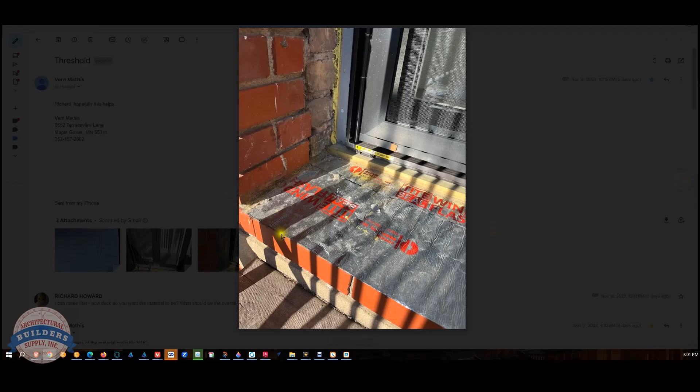We have a project where we've got a client who's ordered a custom threshold from us, and this video is to discuss and document basically the process of creating this custom threshold. Let's do that now. Okay, we're really in the final passes now.

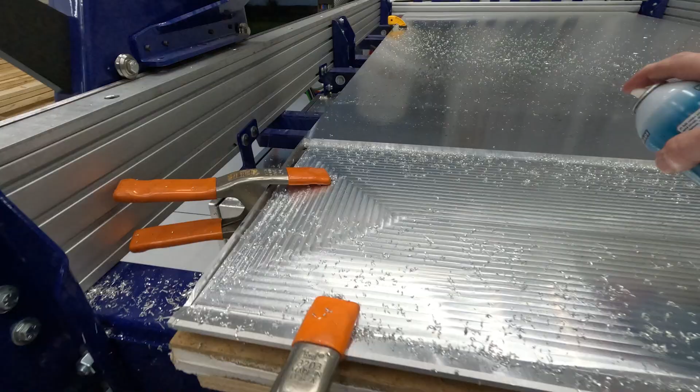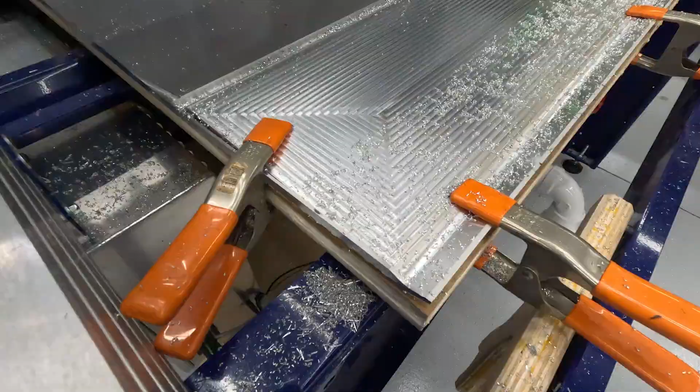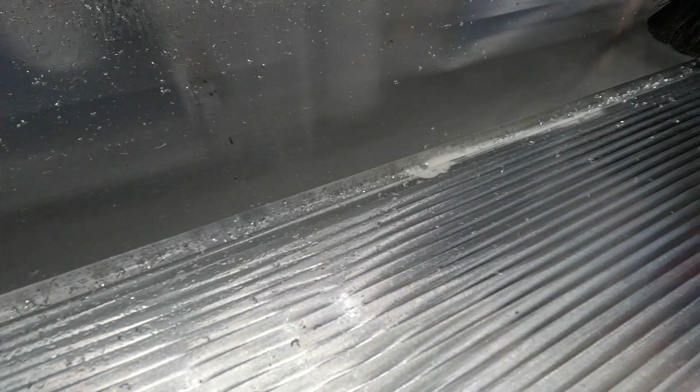Clamped down pretty doggone well, I'd like to think. No. We're going to have to go back and run that just a little bit deeper. We're not all the way through. We are not all the way through.

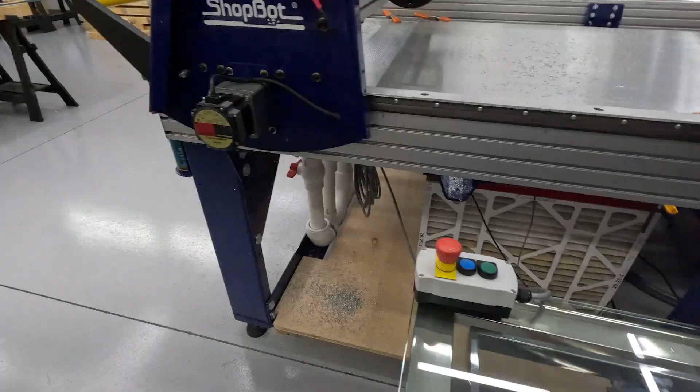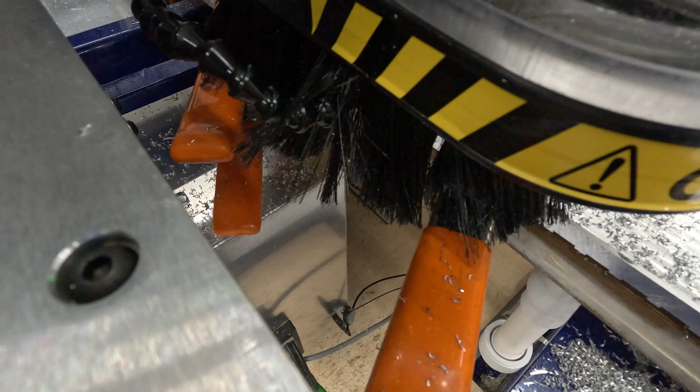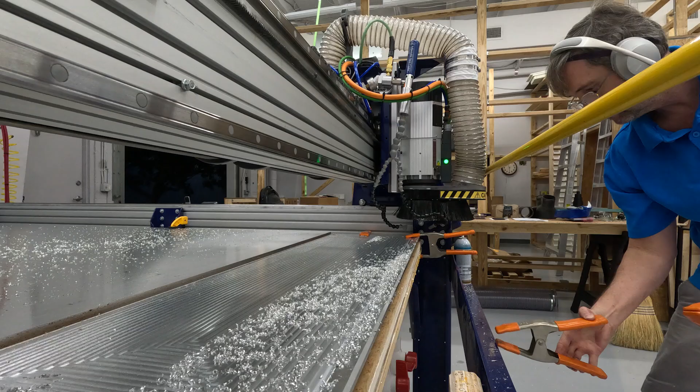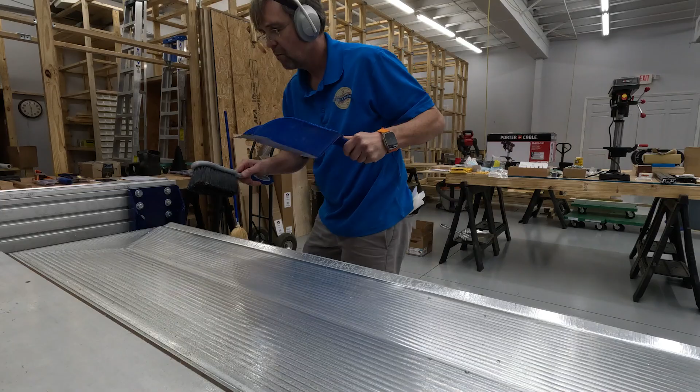Being real clean right there. Excellent. Now let's see what we have.

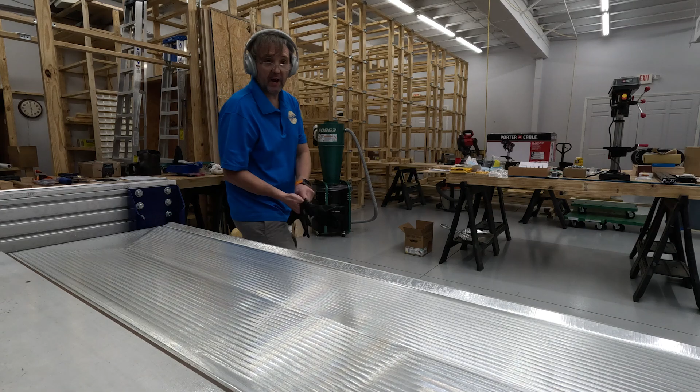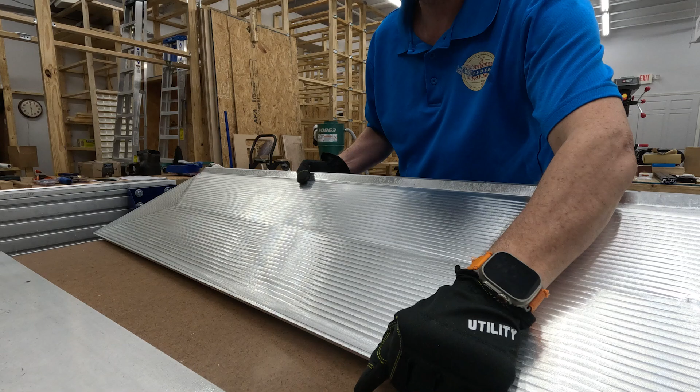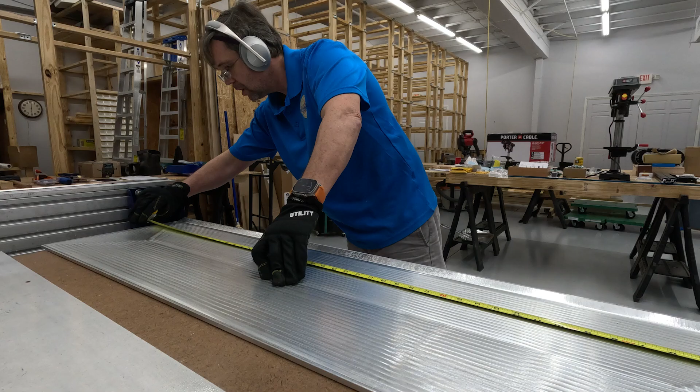This looks spectacular. This is the first threshold. First one ever made. It's 1/16 of an inch too wide, and I know how I did that. I know what I did. That won't happen a second time.

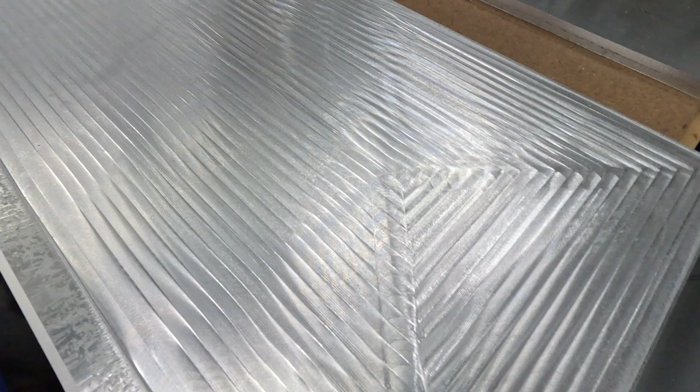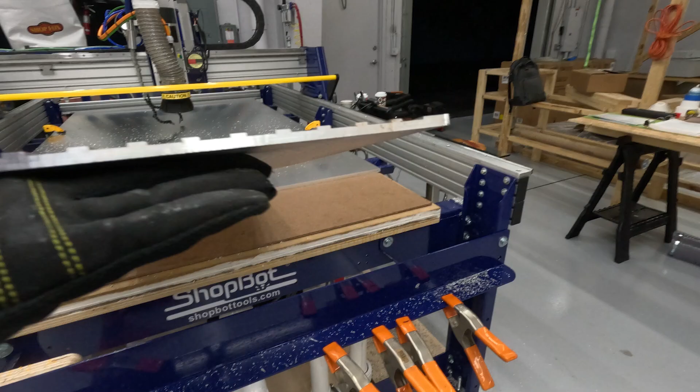It looks a lot more awful than it feels. This is all very clean. Looks really nice. That's just incredibly impressive. Beautiful. Beautiful. Probably do a little bit of cleanup on the top side of this.

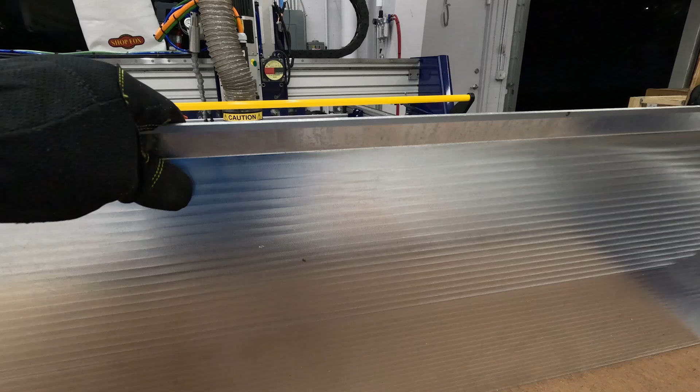I'm thrilled with this. Probably clean off the leading edge a little bit. I will. I'm going to give this some TLC tomorrow, and then I will show you the finished product before we're all done.

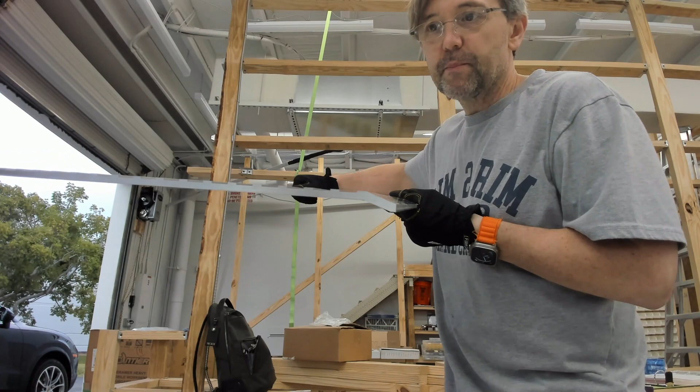Here it is. As far as I'm concerned, it looks phenomenal. I mean, for my very first project ever done with aluminum, quite frankly, while I've owned CNC equipment in the past, it was always more so in a sense of it was my company, and I'm in sales. And while I worked in the shop a lot, it wasn't what I did 8 hours a day.

So I knew how to use one of the two CNCs, the multi-axis ATC SCMI that we had. I never learned how to use that. There was no Vectric, I think, back then. Anyway, so the threshold looks really great. So some of the key components,

obviously the leading edge. Okay, so that's handicap compliant. That's an A117.1. That 140-degree angle does not violate the rise over run restriction. So I know I'm good there. The face of this also doesn't violate ADA requirements because it's not greater than a 1/4 inch.

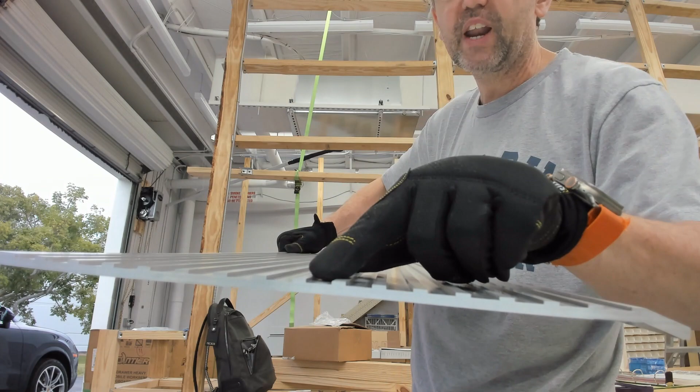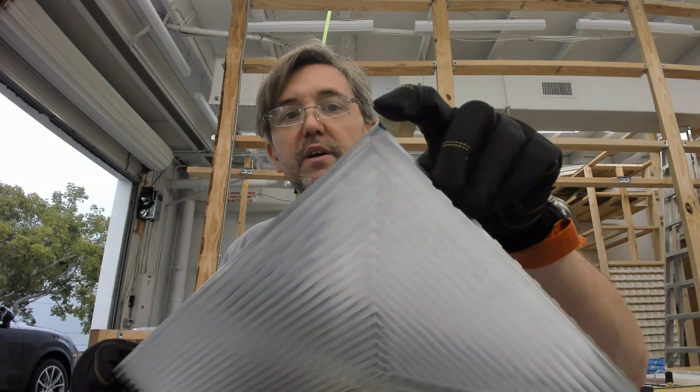The fluting on the top worked out really well. What I will do next time is that's a 16th of an inch. I won't do that again. I'll do 50 thousandths or experiment. I think it looks great, but I think it's also too deep. Okay? Because I'm off a 16th of an inch, my back end, I've got a couple of little artifacts here that I've got to file off. I've got one on either end.

So I V-groove cut this first. I think what I'll do next time is I will not V-groove first. I'll V-groove second. Again, that little giddy up that's here is because the piece was actually curling up ever so slightly. Machining on the backside looks, I mean, it has this pattern design, but it's just milling marks is all it is. Very smooth to the finish.

And I think the important part about what I learned was somehow when the tools were set up initially, our feed rate was way too high, like 4 inches a second. And getting it down to 2.5 inches a second and don't take anything I'm about to say about the RPM, about the feed rates, and the chip load as anything other than, so far what I know is apparently substantially thinner pass depths, substantially thinner, and I wouldn't say slower, but 2.5 or 2.9 or some in the 2 inch per second range.

And I'm getting RPM and the feed rate out of the Onsrud catalog where I'm looking for chip load. So the back of their solid carbide metalworking catalog, they have two catalogs. One is solid carbide for metalworking. They've got chip loads in the back, and I'm using those chip loads. This is an absolute bit in their catalog. The problem is that V-groove bit, I don't have a chip load for cutting aluminum on that.

So what I did was I initially started with the V-groove on the top using a too aggressive pass depth, even though it may have been a 16th. Well, 140 degrees, that's a lot of surface area, I came to realize. So I think I made 17 passes on the bottom to get this. And it's good. I've also learned about climb versus conventional cut.

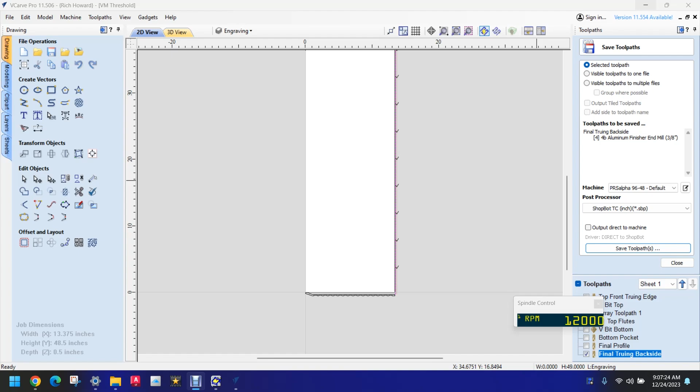Actually, before we move on, I want to engrave the client's order number on the underside of it so that it's there.

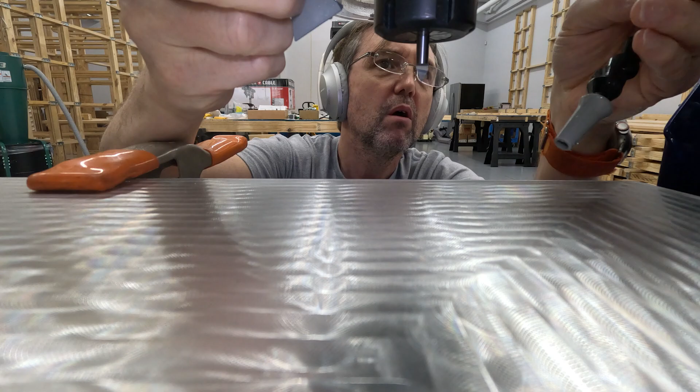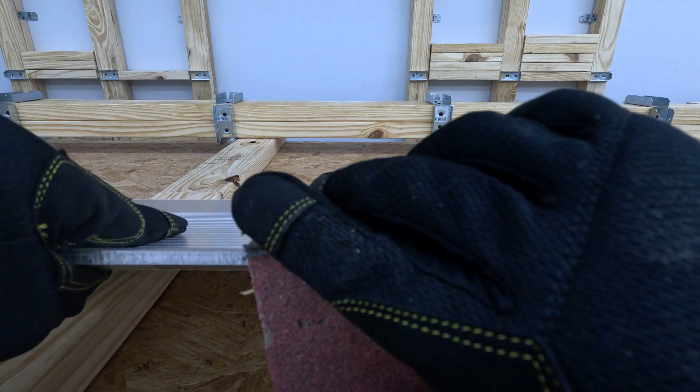Really nice. Okay, so now I'm going to put a little TLC into this. While we've got the camera rolling, we're just going to continue on. All right, so let's take a look at the leading edge of this first. Leading edge is a little bit gummed up, and I can see that hitting it certainly isn't a bad thing. Smooths it out slightly, but not noticeably. But certainly doesn't polish it.

I'll have to look into what aluminum polishing is actually all about. Really didn't do much but deburr it at the most. A little bit on the leading edge to see what that gives us. Yeah, it appears to dull the tool marks to a small extent. Yeah, I think what it does is just affect the way that the light actually hits the piece itself. Like I was saying, I'll investigate what aluminum polishing is like at some point.

And really what I'm doing is taking off the markings that were on the aluminum from the mill, or from the supplier, I should say. I don't think there's a mill. It certainly made it a gray, but there must be... I'll be very interested to learn how polishing actually works on aluminum, because I want to be able to offer these as polished units. So that's just after sanding it slightly.

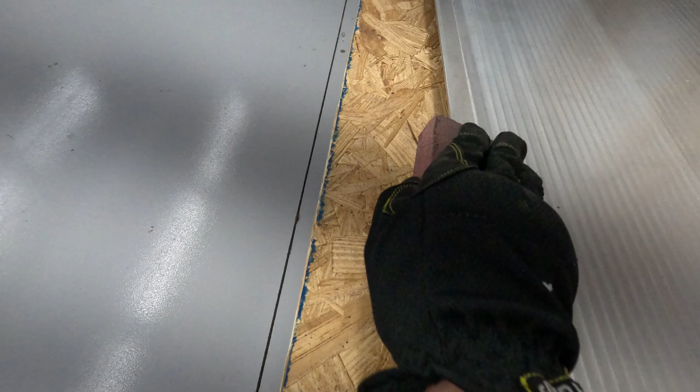Yeah, you can still see tool marks here, but they're all but imperceptible. Very, very slight. And again, probably a last pass. This was the very first cut that I did, so yeah, it's going to probably be the lousiest. On the bottom side, really not much here at all, except to flip it over, maybe clean up the inside. Bevel, V-groove. Gives us a real smoothing over.

I believe the last thing I'll have to do is just nip these little artifacts off. Like I'd mentioned, one at each end. Beautiful. This is it. Blow it off with some compressed air. This job is done. Let's do that now. Get a final look at what it looks like when it's cleaned up to a certain extent.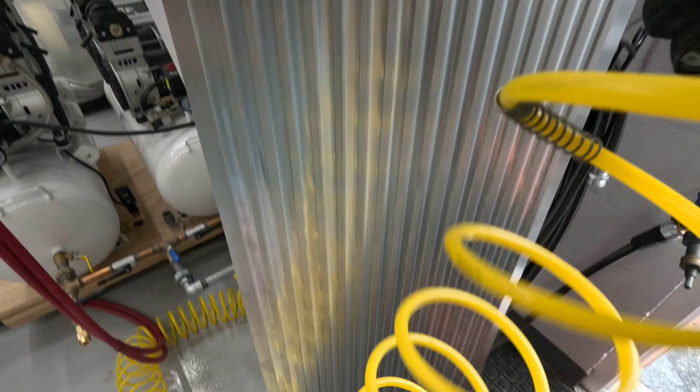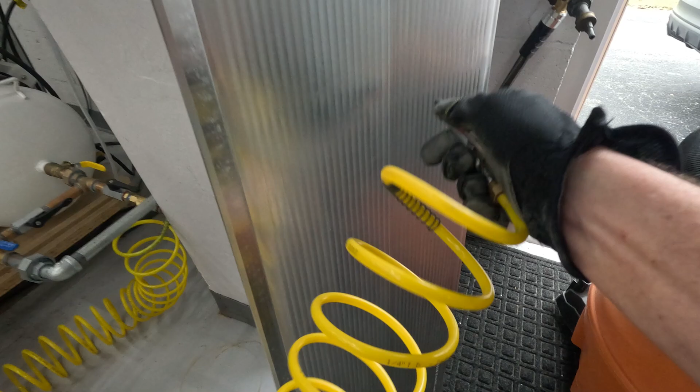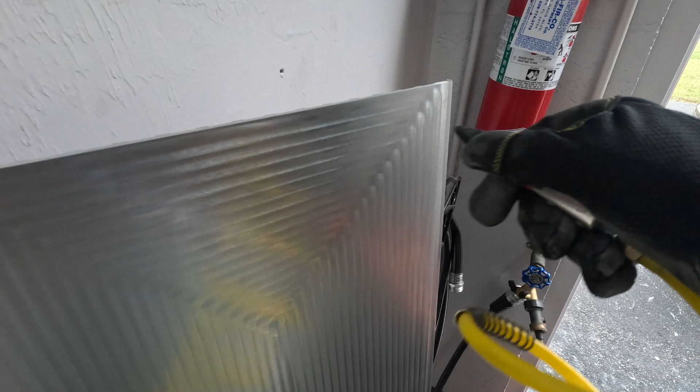I'm not ready to say that milling, machining is easy. But I am ready to say that it takes learning a skill in terms of how the material actually wants to be worked. Proper techniques, or the best techniques, I should say. I think this is it.

But consider it a rental.